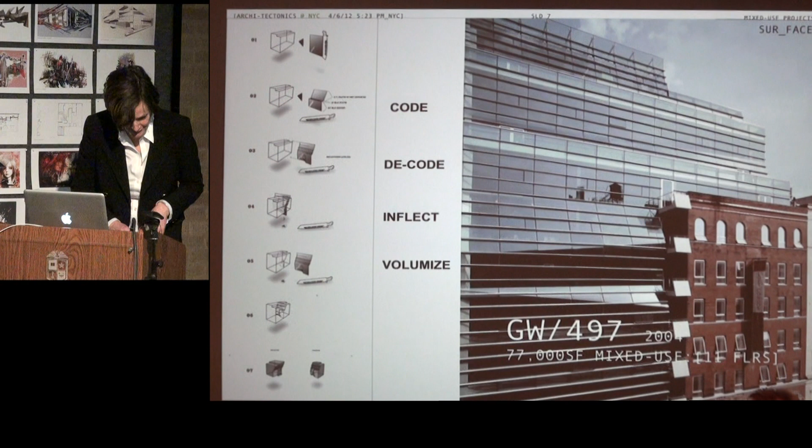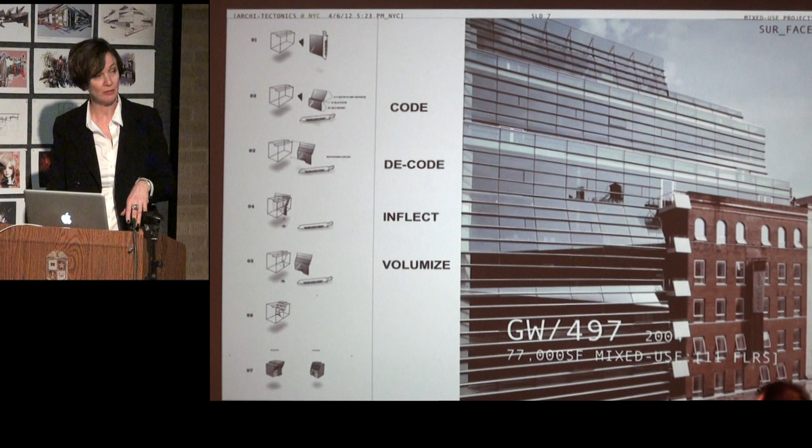I'm a bit of a mathematics enthusiast, so I started thinking, if we use inflection as a method, could we inflect that sloping plane? Using inflection means the sloping plane inflects on the straight and vice versa, creating a system that ripples down from the top and transforms the facade not only in 3D, but into a membrane you inhabit. So the idea is no longer that you have a building and smash a facade on top of it, but the facade becomes three-dimensional and inhabitable.

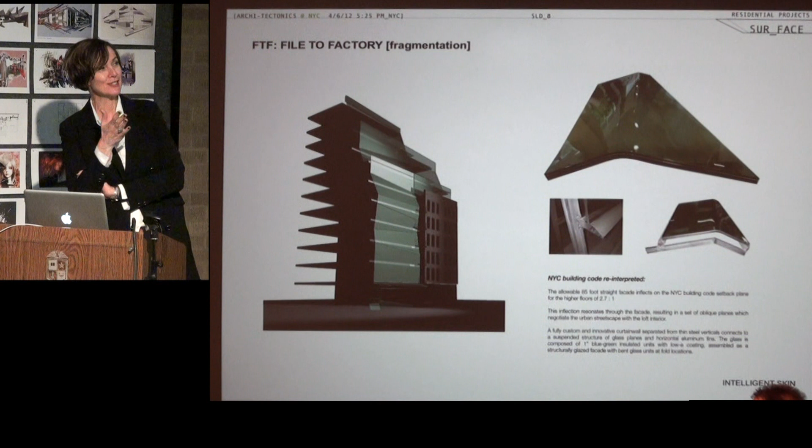So in essence there were two solutions: either I didn't do a folded curtain wall, or I stopped calling it a curtain wall. I decided to try that first, so I called it a glass wall instead. This sounds peculiar, but a curtain wall is a standardized system, and standardized systems are very 70s—you repeat the same unit over and over. If you call it a glass wall, it means it's customized and you can do whatever you want.

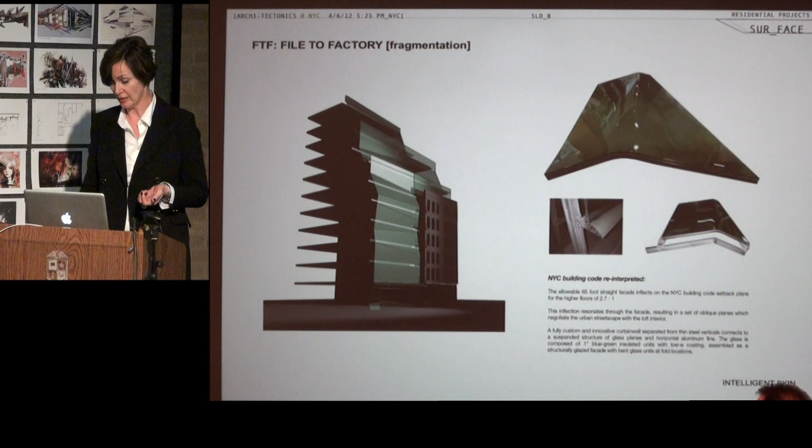That's what we did in the end. We started fabricating the glass in Barcelona with double glazing, extruded the mullions in Hong Kong, and put the whole thing together in Brooklyn to build this facade, which was a little scary to begin with. When the glass arrived, it was one of those moments where you think maybe this wasn't such a good idea.

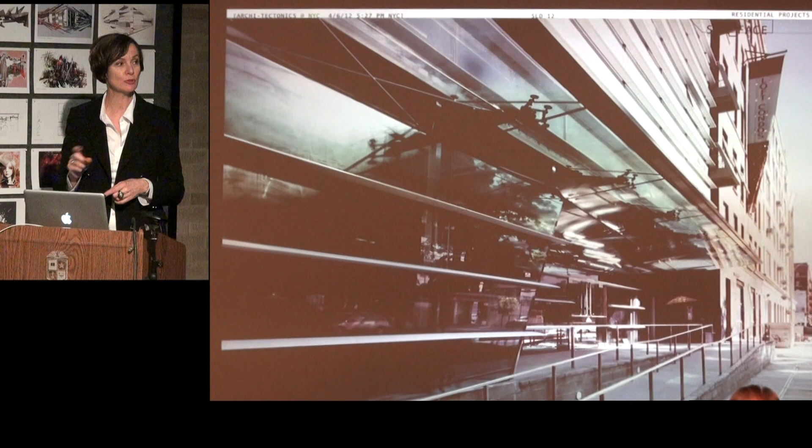This was also the first time I started thinking about parametric design, because if you build something in Barcelona where people speak Spanish, and in Hong Kong where people speak Chinese, they don't necessarily communicate well with each other, or with us. So the only way to get this done was to send 3D files around rather than 2D drawings—we sent 3D files with XYZ coordinates to all those countries, and only made 2D drawings to put it together on site.

We did this with Form Z still. During this period we designed everything in 3D but drew the construction drawings by hand, which was a very peculiar phase—exactly the opposite of other offices who sketched by hand and put everything into AutoCAD. It worked a bit backwards, but it was the way to do this, I guess.

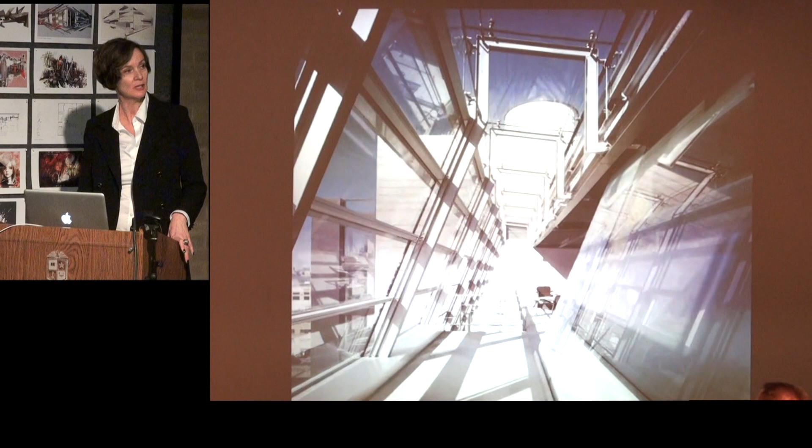Halfway through this building, we gave up on drawing by hand and moved to Vectorworks, which was a good solution. What I want to point out is that every time the facade turns closer to an edge, we made it very 3D. For example, where the entrance is, the glass wing folds out and becomes very three-dimensional, and up top it comes up and over to form a glass bulkhead.

This is the entrance to the roof terrace, where we convinced the contractor right in the beginning to drag this huge piece of glass up to the roof, about 20 foot long, and then glue the pieces together to make a glass bulkhead for the penthouse people.

In the building, we actually didn't make traditional layouts. I'll explain more about that later, but I kind of hate hallways in the traditional sense. Also in New York, it's hard to predict which people are really going to buy your spaces. This particular one is a 3,000 square foot loft for one 28 year old person, but there were others like 1,800 square feet for whole families.

So we designed this for him, and we started thinking it would be beautiful to have an east-west connection, so you see light coming up in the morning and going down at night, making an artery which becomes the connective device for all the private areas.

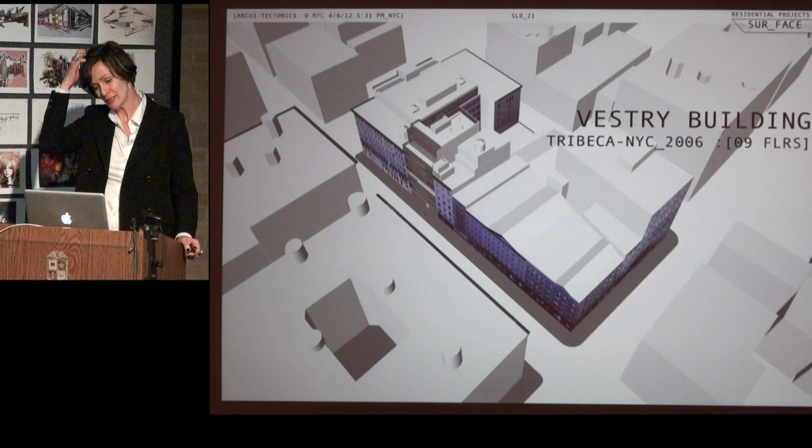Not long after, we got a question to fill in a parking lot, which was here. This is in Tribeca, a landmark district - we try to maintain everything in New York. Even though Tribeca is a set of warehouses, there's the idea that it would be a landmark, which I think is good. The thing was we had a parking lot, so if you wanted to keep it authentic you would actually not build anything, which of course as an architect I wouldn't promote.

So they gave quite some liberty, because what are you going to do? If this building is completely different from that building, or that one, or that one, it's kind of hard to define what a landmark is or how you would even build it. So I told the landmark committee that I was more interested in the quality of an old building rather than the actual copying of it.

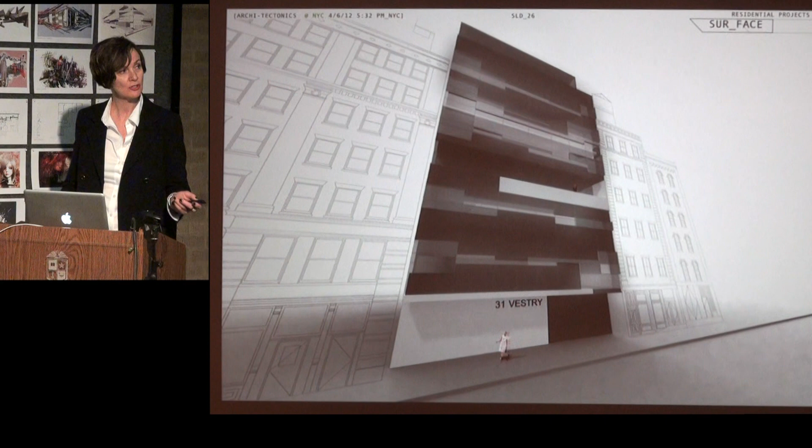What we did is we took the two rhythms of the neighbors, looked at the proportional systems of the old architecture which gave us really generous ceiling heights, looked at proportional systems of the building volume overall and the materials in Tribeca, which are stone and steel, and came up with a pixelation of stone, translucent stone, glass, and translucent glass. It's really important for us, with a traditional building, to delaminate and fragment it into a very flat facade on the north or street side, and a very delineated, highly accentuated facade on the garden south side, so the sun gets deep into the spaces but doesn't overheat any of them.

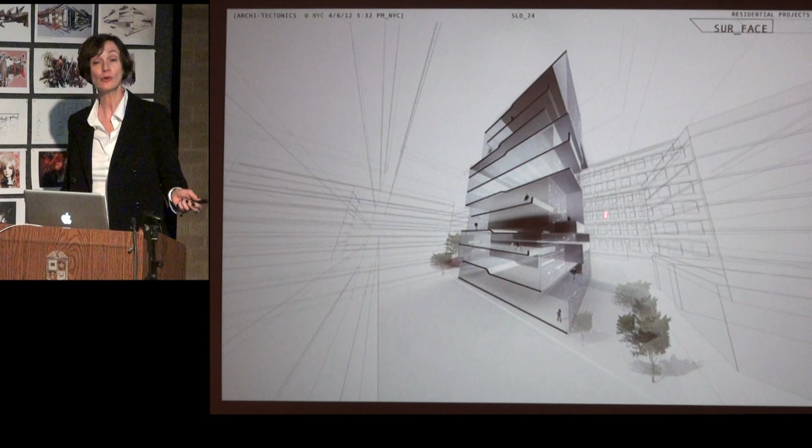The building method we used for that is to actually use poured-in-place concrete, so that we could use a very strong frame which starts to carry the whole building. And rather than making walls, we compressed the space on the street and made it lower, and then opened it up in height at the garden, so you get deep, deep spaces. That's then the first kind of idea of the back facade.

This is not exactly a building for poor people. It is basically a set of stacked villas. And it made me realize, as I said before, standardization is something of the 70s. It also counts for how we build our apartments. If we live in a building with multiple apartments, there's no need for these apartments to be the same. So here we find two triplexes, full floors, and then a duplex. Essentially the idea is that you make them all different, and then you can go shop for your apartment like you would for a sweater. Fit the one you like, and have that one as your apartment, rather than thinking I'm going to have the same one as my neighbor. I think that's a more inspirational idea.

And then in the front facade, because we did this pixelation idea, which by the way was a quite interesting thing to explain to a preservationist committee, where you have 30 preservationists and they all expect you to preserve something.

So I had to give my parking lot story. And when I explained, and really we did an extensive study of the buildings in Tribeca, they started to get into it, and in the end accepted it, and even asked us for slides, because they thought it would be a good example of how they wanted to do their future landmark building. I thought that was quite a compliment, because I was mortified when I stood in front of them, I have to admit. It wasn't going so well in the beginning, so I remember when I was explaining it, I was like, oh, I don't know where this is going.

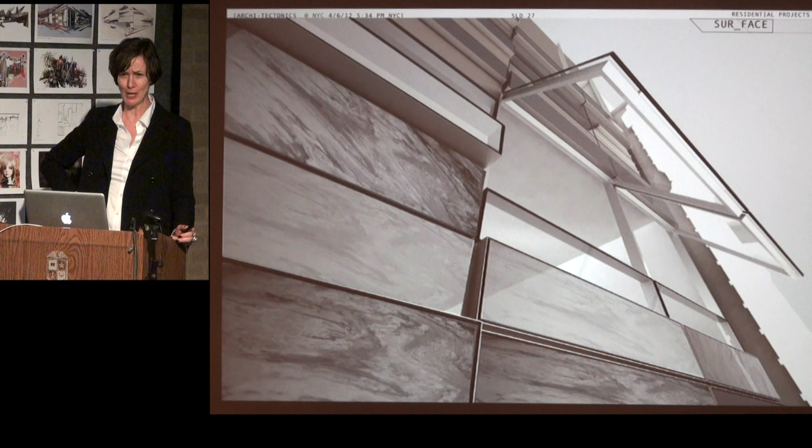My client was sitting in the back, and I saw him becoming more and more purple. We had told him, please don't say anything, because he's very passionate. At some point he couldn't hold it anymore, and he stormed to the front. By this time he was dark purple, and said, well, I just want you to know that I'm spending a lot of money on this building, and I think it's going to be amazing quality, and we really studied this. This is what I wanted to say. And then went off again, and I was like, oh yeah. That was maybe not the best kind of preservationist story.

But it was interesting because I do think his passion and his commitment to quality was actually really convincing, and so we got to build this building. Now, what you might have also noticed, I'm extremely interested in innovative or hybrid materials, because I think where we are now, the fact that we can use hybrid materials and actually innovate materials by making them hybrid or mutant is that they become stronger, more interesting, and you can do more with them.

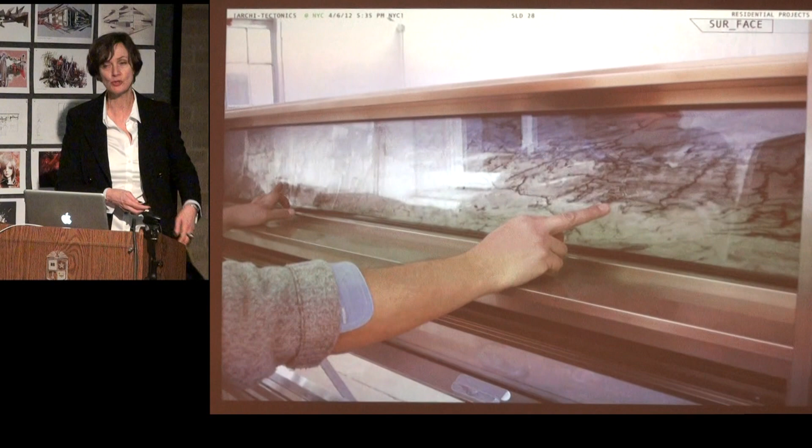So in this case, this man is pointing at translucent stone. The person we met was in Spain, but in the end we made it in Italy. It was funny because the curtain was made in Italy, but the profiles, I forgot this thing, the profiles are ultra thin. These mullions are very, very thin, reinforced with steel. They're from Schüco in Germany. So it's a very international little facade.

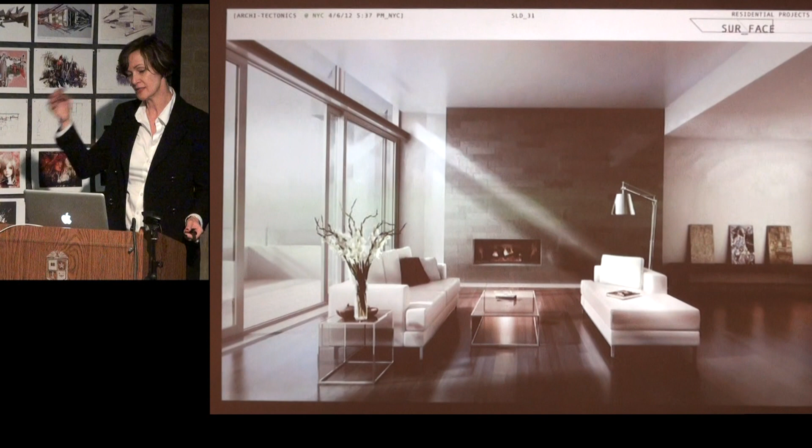And this is then how it starts to look, and this is how it looks now. So you get these kind of small protrusions. We made the boxes in very thin stainless steel, so they really look frameless and they're suspended from the facade. And then here you see that kind of idea of the huge extensions in the back. So the idea is really that you have in summer a bigger house than in the winter, but visually a lot of light, but not a lot of overheating.

And of course bathrooms, as you might have noticed, I have a bit of a bathroom theme. I have actually two things: I'm against hallways and I like nice bathrooms. But my bathrooms are a bit excessive, so these are all on the facade with sandblasted glass and some stone in it to make it a bit more private. Steaming doesn't necessarily work when you're in a city, but I think it's really important. If you live in a big city, it's one of the moments where you actually relax and can have a moment of peace.

The penthouse, I started thinking about turning it inside out. So on the bottom, it's really wrapped in a big terrace. But then here, this stair was a small inspiration from my trip in Greece. I realized it's very nice that these houses in Greece have this constant in-and-out relationship through external stairs. And then, of course, when you go up, you have a nice view and a pool.

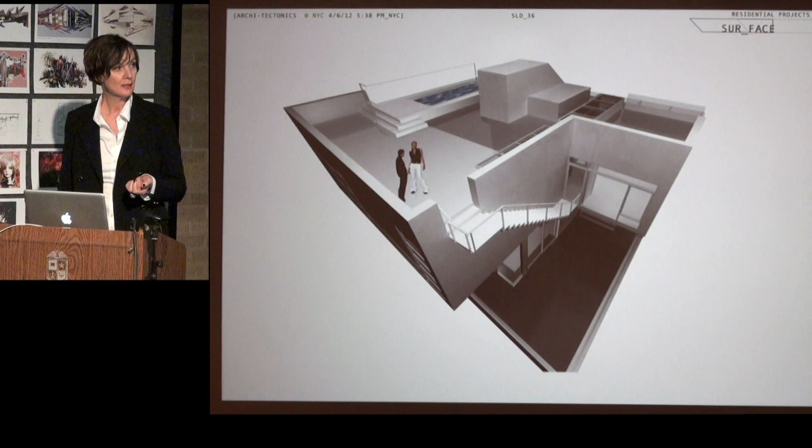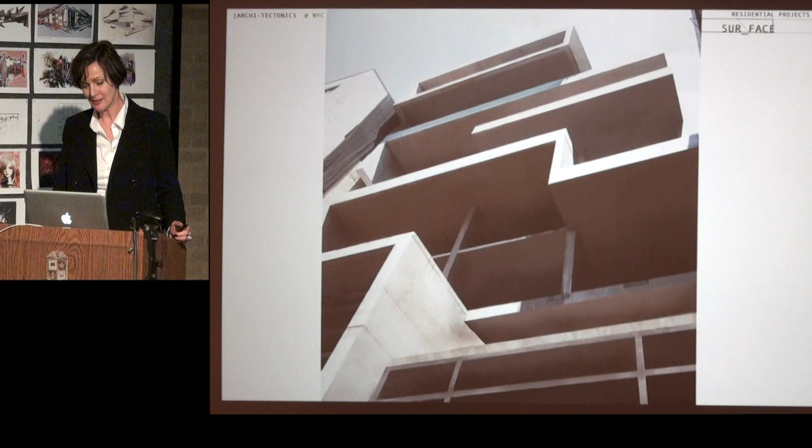If you build it in concrete, the benefit is you can really extend or cantilever the stairs from the concrete wall itself. It's a little bit like a stairway to heaven - you have that feeling where, just in the last moment, you cut through the wall and go to the roof terrace. This is my favorite moment of a building, where the little diagram we made in the beginning is actually built and comes out as exactly what you started to think about. When it's done, it becomes a little less obvious, but a lot nicer to live in.

And we started finishing this with recycled Ipe.

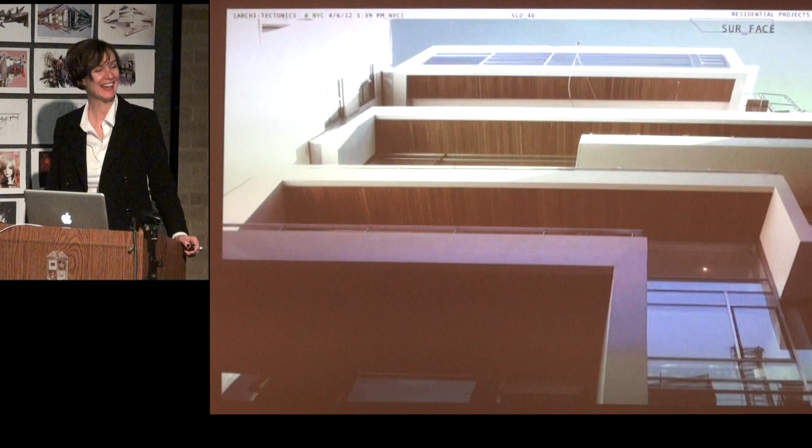The benefit of working with Italians is that they're a lot less sensitive to liability, so they can really build large spans - they're not afraid. They come in with huge glass planes, break it a few times, and ship it over anyway. They're very happy, always positive - I have the best conversations with them.

And then here you start to see - so these are the two. This is one of the triplexes, which has a kitchen down here and a connection between the bedroom and the living room. The one next door has double height between the living room and dining, and has a separate balcony for the bedrooms. So they're essentially completely different.

What I forgot to tell you, which is maybe interesting, is that this looks like the ground, but it's actually the roof of the basement or cellar, where we have parking. So in the front of the building we have a garage door and elevator - you put your car in, go down with the elevator, park your car in the basement, and go up to your house. It's a very New York solution to life, which here would be completely ludicrous, but there it makes sense.

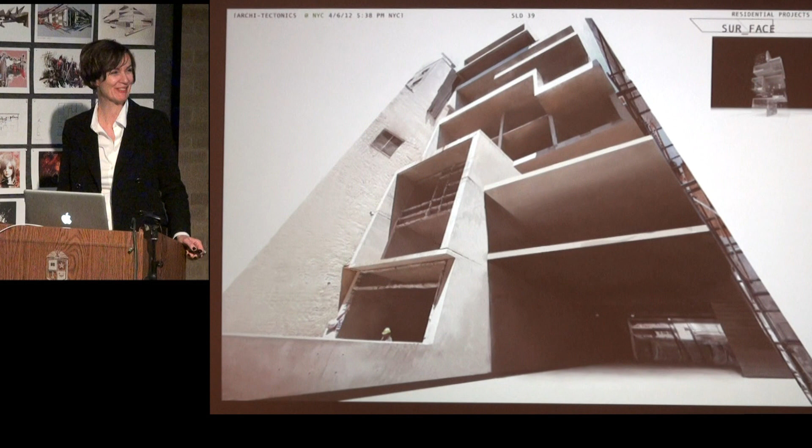My client came up with this at the last moment - I'm very European, so I put small cars in it, like an Audi and Mercedes and whatever. And he's like, 'but what about my Suburban?' I actually saw them fitting a Q7, which is kind of a smaller Suburban.

And then here you start to see the stone, how it starts to reflect from the inside. What's very nice is that by day the stone glows on the inside, but by night it's the opposite - so the building really reverses.

This is another bathroom in the facade where you have the stone, and then different layers of finishes. All the tiles we use are stone tiles, and in these bathrooms we use the same marble. The marble story is another one - it's quite interesting. If you ever have to choose marble, it's not easy. You get a stone block of 7 by 7 by 7 feet, and you have to predict how it's going to look. So it was quite a relief to see that it actually worked out.

And then we do smaller projects. This is the creative director of a company we also do the stores for internationally - we just did one in London, Shanghai, and Paris.

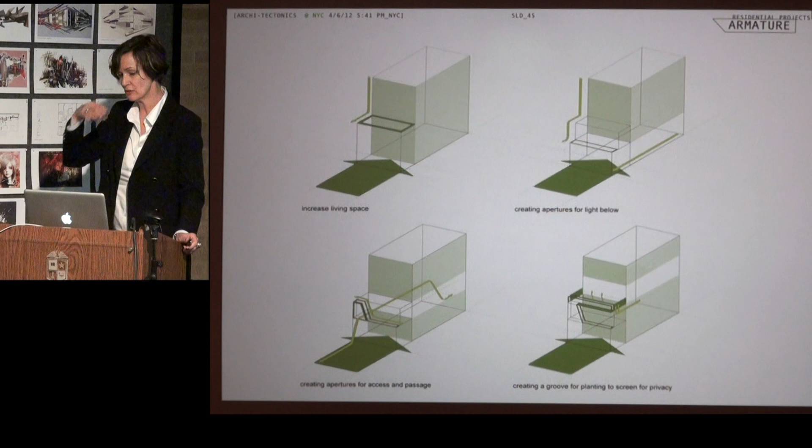When I met her, initially I did her townhouse with her. In New York, what happens is you get a townhouse like this, and you're allowed to push out the bottom two floors by 12 feet, which we did. So that was extended, giving a bedroom floor with a large terrace. But more than that, we thought it was really important to have this oblique connection, because the one thing I learned from the Greenwich Street building, the first one you saw, is that when you fold things, you have not only a folded facade, but also beautiful connections up and down.

And so that building is actually quite voyeuristic. I live there too, and I found that no one ever talks about that, which is quite cute. Everyone's looking at each other and no one is talking about the fact that you can.

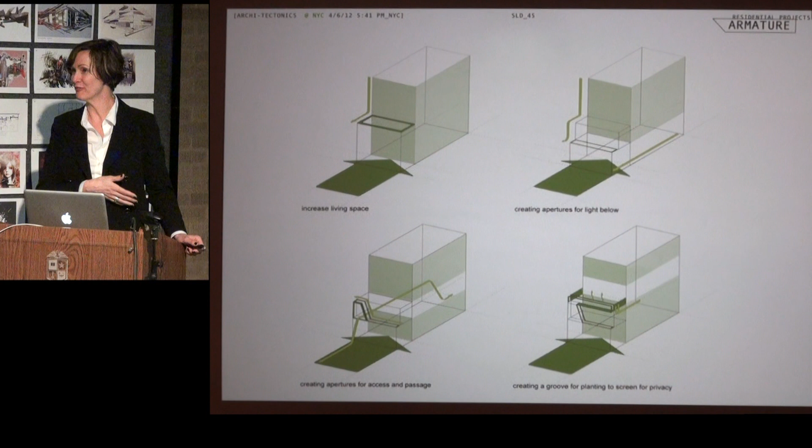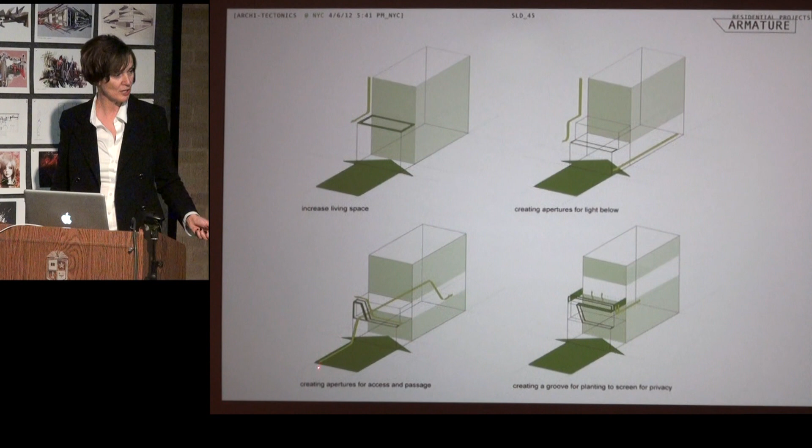But since this was for one family, I thought it'd be more excusable. We thought it'd be really nice to have a writer's studio for one of the partners on the ground floor, and then the second floor, the parlor floor in these old houses, would be connected vertically through a fold in the facade, as well as from this door you could go down to the garden. So we started working with the facade so you have this connection from the writer's studio outside, the garden becomes an exterior room, the living room also has access straight outside. And then here you have that oblique moment where you can actually go outside.

Again, this facade, I got really into customizing facades when I did that big building. This one is made out of double glazing in very thin steel. We finished it with a car paint, very heavy black car paint. And then everything is openable. The doors here are steel with wood. This is recycled wood from an old boat I bought in Bali for like 3 clients at the same time, because there's a lot of wood in the boat. It's really beautiful palisander, and you see it here on the stairs.

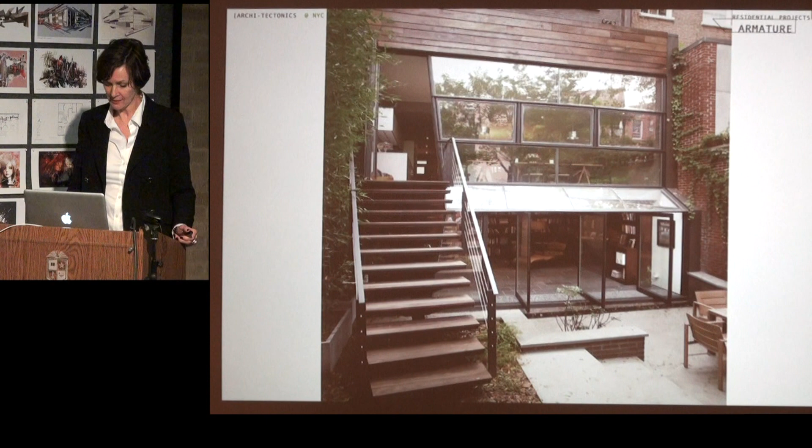And then you have this amazing connection with the garden. So this very thin facade really extends to the outside. Because the building originally has a very small floor plate, every floor plate has one function.

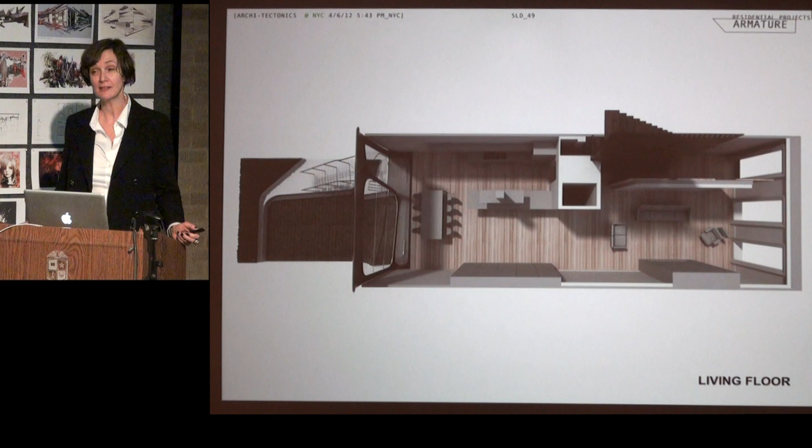So the ground floor has the writer's studio and a small guest room. This is the main floor where you come in. We totally took the stairs out. This is a set of doors I'll show you in a moment. We made them with a 6-axis CNC mill, made in LA by one of my friends who has the biggest independent car design company. And then you have living, dining, kitchen, and the stair to the garden.

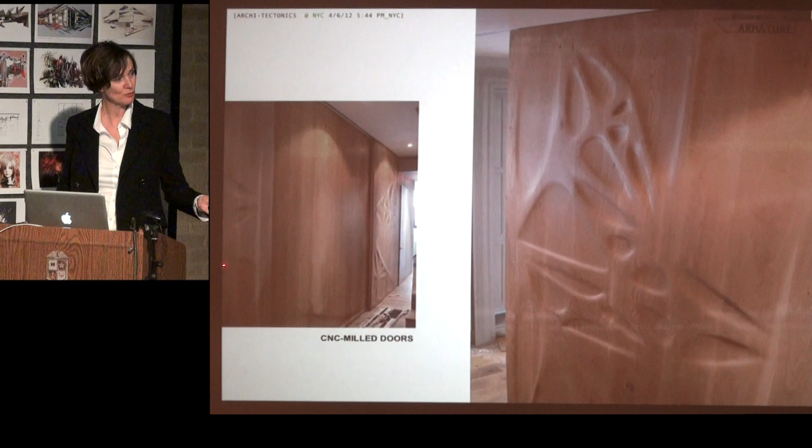And these are the doors. The idea is that in winter you want these doors closed, and then the whole wall has one pattern. In summer you would like these open, so you open it and then it forms another pattern. These are very, very thick wood doors, incredibly heavy with a very heavy track. But it's very pretty to see this kind of continuity. So here, for example, they're open, you see the living room.

And then the new stair with a glass sheet which runs up 4 stories, all the way up and down with a skylight on top. The bedroom area with the extension with the terrace here, bathroom, bedroom, walk-in closet, and the bathroom.

Again, a very small bathroom. I started bringing stuff in from Bali. This is made in Bali. It's really a nice bath, made from very, very thin concrete, colored through and through in white. It's interesting because this is actually Corian, shaped in one piece, which looks very similar, but this is actually a cementitious bathtub.

And then this is that terrace where you have these same doors again with the palisander in the black steel, all pivoting, and a big bench planter where you can actually have that extension of the bedroom in the summer.

And then we grew a little bit, so we started doing bigger things.

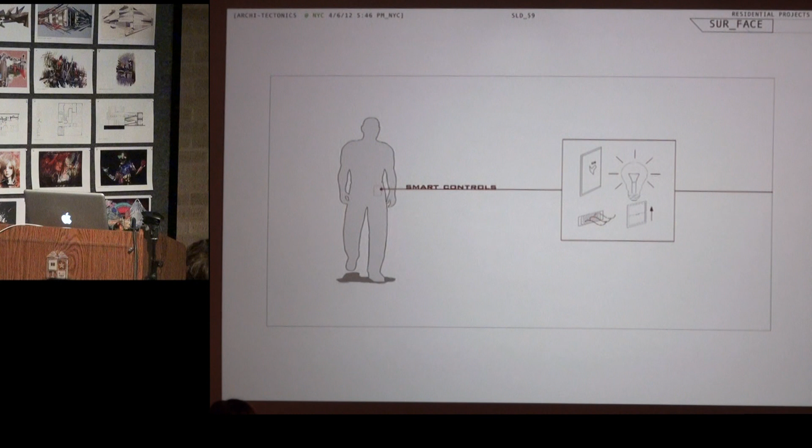One thing I wanted to show you, since we were talking about that, this is actually the beginning movie. Someone actually recently asked me, is this the only thing you gave to the contractor? Which I kind of like, which it was not. Of course, I broke this, sorry. My engineers are better than me.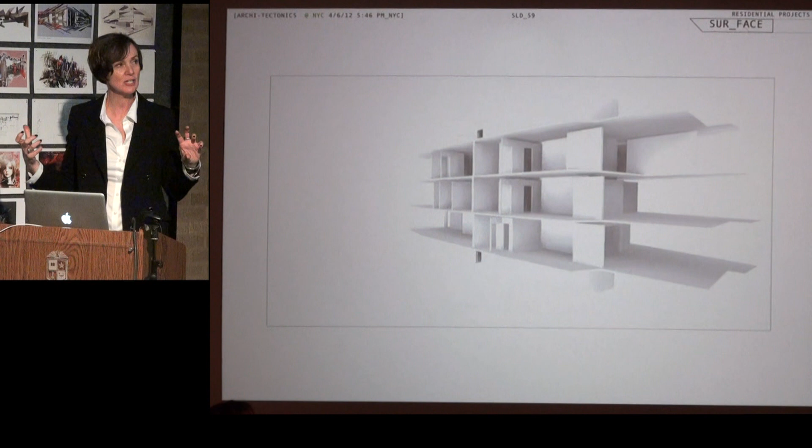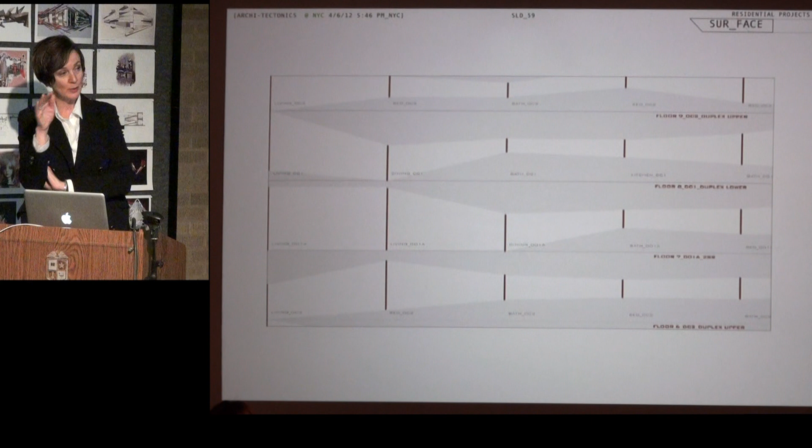So yeah, this is the robotic tower where we worked together with MIT Media Lab, and as you saw in the beginning, it was mostly making the building intelligent by linking existing technologies in a much more sensitive and intelligent system. Not completely reinventing the whole thing, but really linking existing systems, and then again thinking that each person should have their own apartment and be really special, making different algorithms for facades with one basic rule: everyone gets a window, every room gets a window. The windows need to be fluidly connected, and each apartment should have a different layout versus facade connection.

Then the other thing is, because I'm Dutch and very social democratic, I always think it's irritating that penthouses are on top of a building, because I like the second floor. And if I was ever rich and wanted a penthouse, I would like it on the second floor.

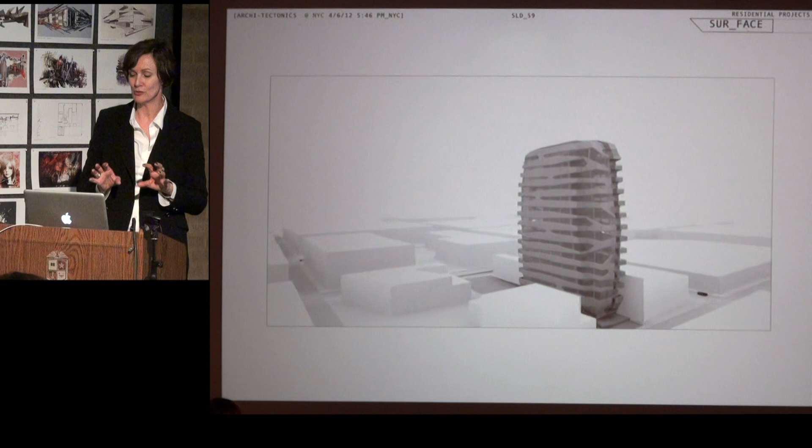So I convinced this developer to do 5 penthouses, 2 on the top and 3 distributed through the building. They're basically duplexes with very large glass walls. That was kind of a little victory, especially on marketing people who always do everything very, very basic.

You see, this is a very low neighborhood. This is actually in the more alternative neighborhood of Philadelphia, where there are the younger artists, new restaurants, cafes, and stuff like that.

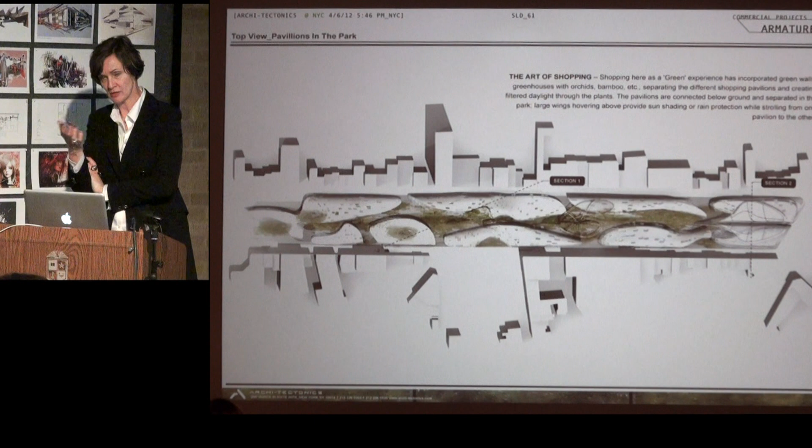It's a big shopping boulevard in the middle of Brussels, and the developer proposed to the city and the state, as Brussels is a city-state, to build and extend the tunnel, and in exchange he wants free property to build on. So he got the ground for free by extending the tunnel.

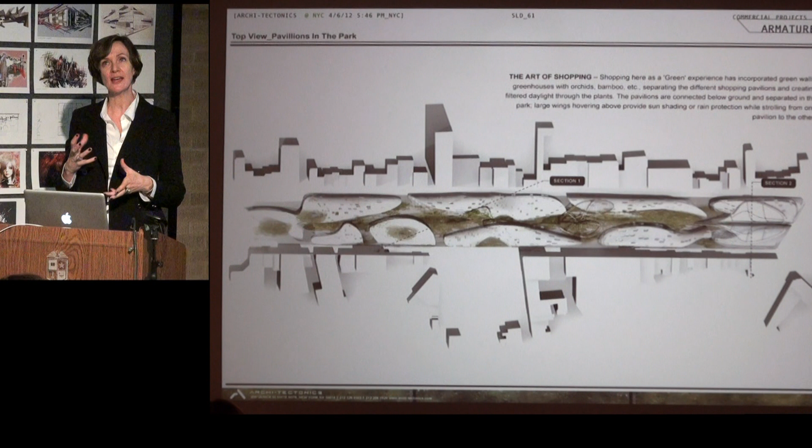Very clever move. And then they asked us to design 10 pavilions in the park. Now I was thinking when we were doing that, how do you get to design the park in the same way you design the pavilion? Or how do you not make a distinction between the two?

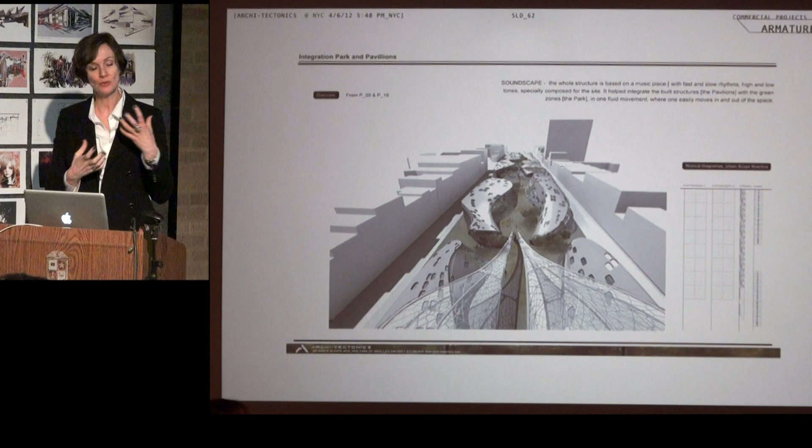And actually what you see on the right is a little graph - a set of, we wrote a music piece for this piece of land, took the scores, the frequencies of the sound, put it in Maya, and started to study the waves of the site, so that the resulting shapes were not only creating an interior space, but even more than that, an exterior space. And that for us was very, very important.

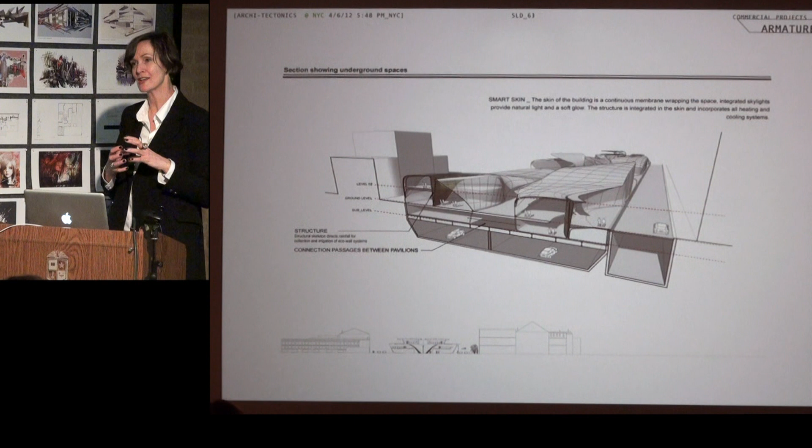The fact that we were on this tunnel gave small problems construction-wise. I talked to an engineer in Holland who was actually the one who in the 60s and 70s started to develop very, very thin concrete shell buildings. We figured out that if we made these buildings from these lightweight concrete shells, it would be possible to span on the tunnel without having to do more. Be careful though.

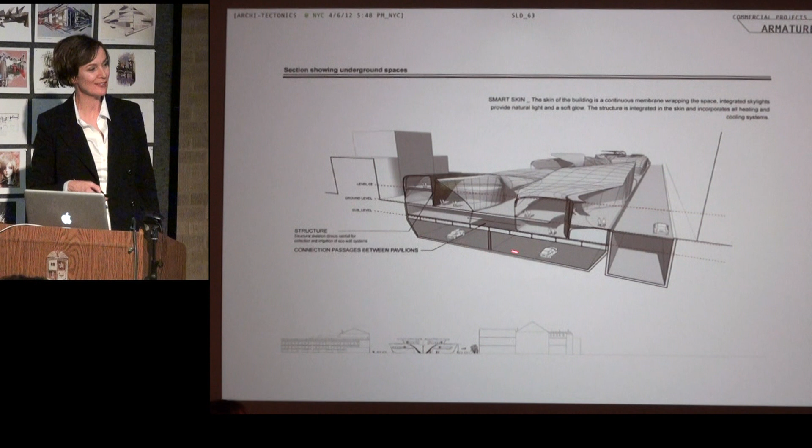These surfaces would collect water for the park, stored in water containers, with an automatic irrigation system. And even more than that, as we figured out, what always is the struggle with developers is they want to build more than you really think they should.

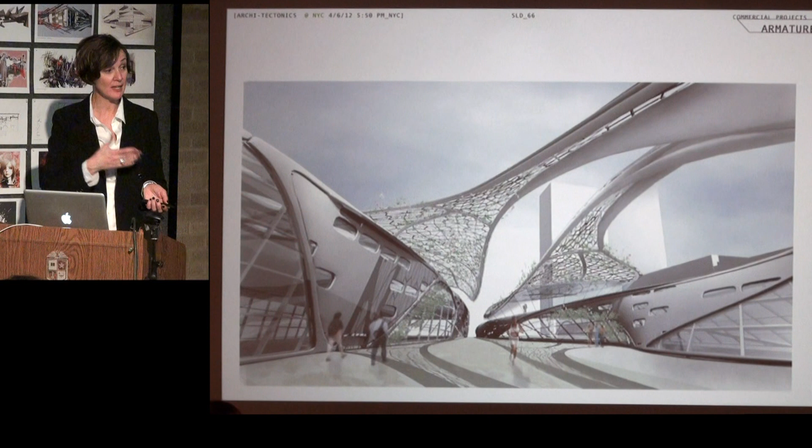I mean, in a way, you want the park to win. So, as the park wasn't really winning, we proposed a set of green solutions, like hanging green gardens, greenhouses inside to separate either retail areas or gallery areas from retail. And we invited, since we were thinking that sustainable could also be really interesting on an artistic level, a whole bunch of artists who were working in kind of green, literally green plant way. So we thought anything plant related had to be either cultural, sustainable, or just pleasurable. The pleasure principle - really important.

And then these volumes - this was one sketch for the hanging gardens, they were here. So long story short, we proposed it to the city, it got approved, then the city said, well, since we are a city-state, the state has to approve it too.

When it came to the state, they had two questions. They wanted 30% to be cultural, which was actually a huge benefit, I thought. So that was nice. But they also wanted an ice rink bigger than the one in Rockefeller Center. I don't know why Brussels is feeling competitive with New York. So I made this ice rink, which is 30% bigger. We thought if you make it bigger, then you don't do 3%, you want 30%. So let's make it 30% bigger.

And since it is not very cold in the summer, this then becomes a really nice square where you can sit on the edges and see performances. Or in winter, you can actually go skate.

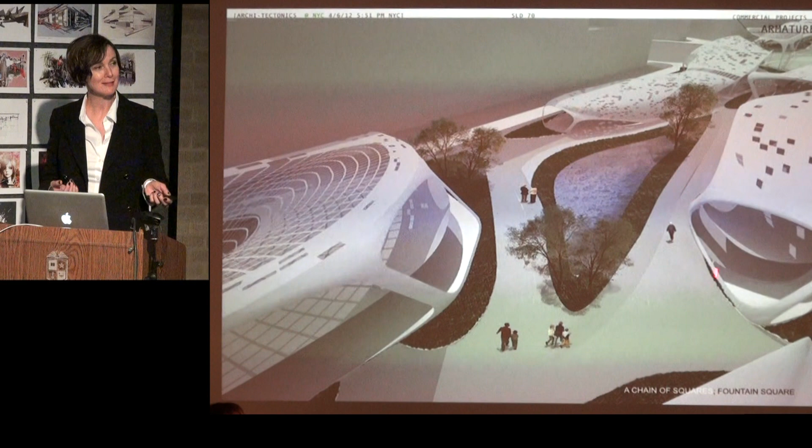And then the other one we added, which we thought, well if we're doing this anyway, the square idea - this is a fountain which reacts to traffic noise. So lots of traffic, lots of fountain, no traffic, no fountain. And also quite a surprise thing, so I thought if you walk over the fountain by accident, you can really experience that.

And then once in a while we do something because we think we should. This happened when this thing starts once in a while to think itself.

Computers should not be clever.

In the middle of a crisis, we realized that, you know, first you feel very sorry for yourself, everything's postponed, things are a little bit slower. And then I thought, well, half the world is doing much worse than we are, so let's think about this again. And thinking about fragmentation, one country which had serious fragmentation was Liberia.

They just came out of 15 years of civil war and are rebuilding their whole country. And I knew someone who was thinking of building a school for all the orphans who are a result of this civil war. And so the fragmentation of the environment has caused a huge change from villages into very, very small communities, which are not always very friendly to each other.

Oh my God, please stop this. I think what it does, whatever.

So what we did is we went there, and I offered the foundation to do the school pro bono for them. And when we went there, I knew we were in trouble.

This is the moment when we, sorry, this thing has gone crazy. Stop, please. That's really interesting, let me just push it back.

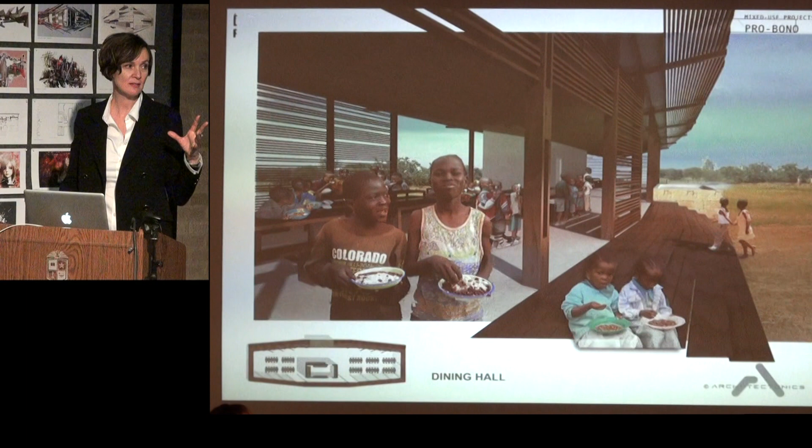So where I offered to do a school, I ended up doing a sustainable village, where we had academic buildings. We started thinking of how to build this and realized that you really have to think about everything: passive ventilation, collecting water with the roofs, storing it, having open air environments like this dining hall, and to make this around a set of courtyards so that people or the kids could do their homework and really feel that this environment is something they feel safe in.

So what we did a lot is make these double skins to have them do their homework, to have them have a filtering, because they have either too much water or too much sun. It's hardly ever that it is not anything. And it was quite important to us to kind of create this kind of new sense of community.

I mean, this thing is totally crazy. Sorry, I don't know what it's doing. Maybe that helps.

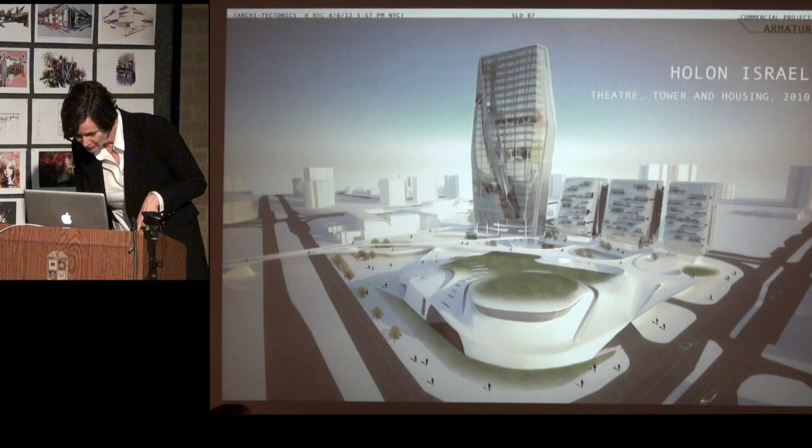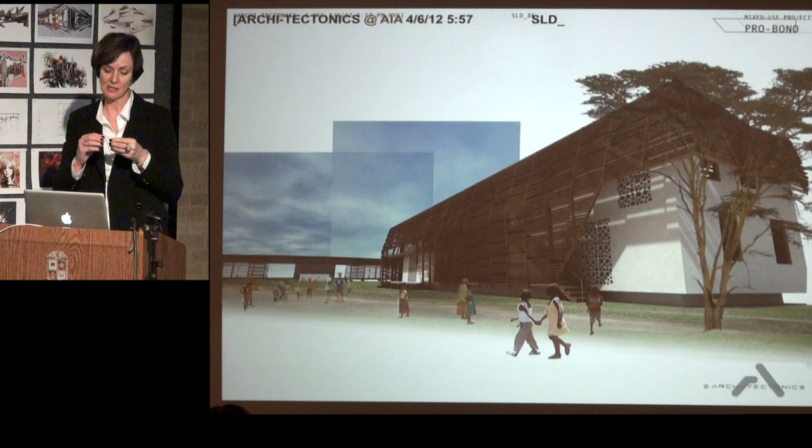But also we try to make it sustainable, not only in the sense that it creates its own energy, also in the sense that by creating its own energy, it can sell back to the grid. So hopefully this little community, which is now located next to a small village, which is another kind of good feedback, will be sustainable also financially, which is the next challenge, of course.

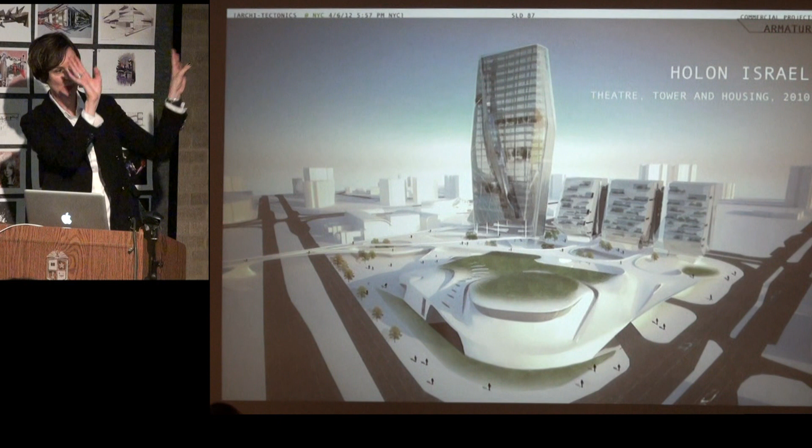Then the city of Holon invited us to study a problem they had, which I think a lot of big cities have. They get all excited about having a huge population, they make all these big highways, and now we're disconnected, right? One neighborhood cannot get to the next one. So they asked us to make a project which was almost like a filter project, where there was a music hall, housing, a municipal tower, and a huge amount of connective devices back and forth.

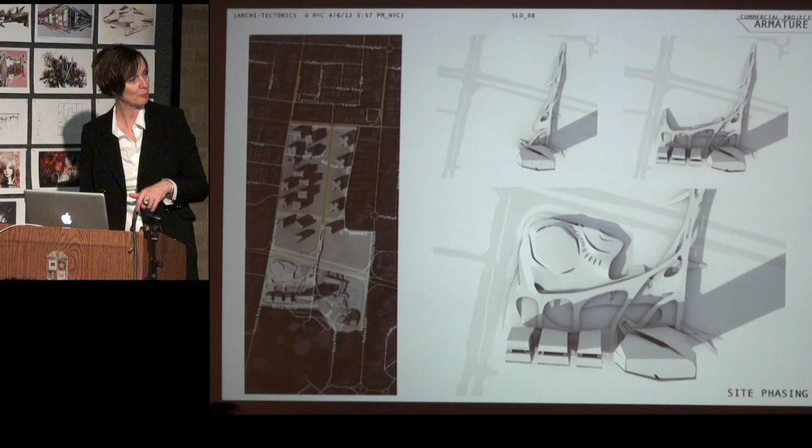As you can see here, this is kind of the plan. The big connection is to the area above here, and so this connection was really, really important. Housing is here with the municipal tower, music hall, and then a very perforated square with all the shopping and the outdoor cinemas below. As you can see here, we're cutting through the housing plan.

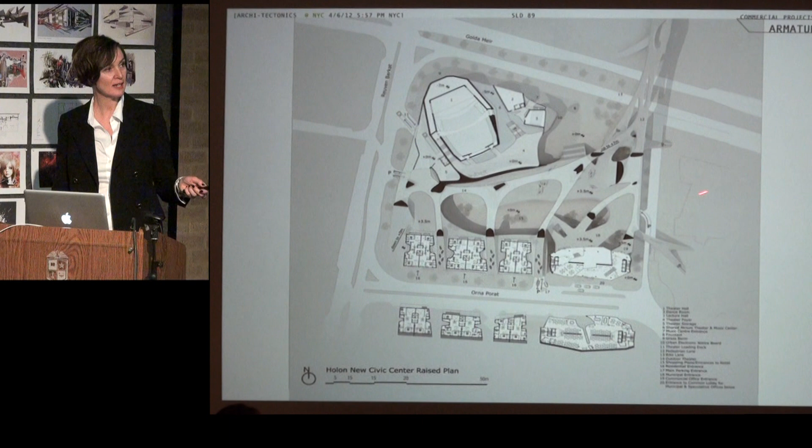Tel Aviv actually is also not that peaceful, as you might know, so there's a lot of bomb-proof rooms and funny construction methods you need to learn. But what we thought was really important also here is it has a very predominant wind direction. So we started looking at whether these kind of almost lung-like shapes could start to work for us, in the sense that it would give a lot of natural ventilation and cross currents.

So here you see the music center, you go down here for the shopping or up there to enter the municipal tower, which is coming from the bridge. This comes down from the shop or up from the shopping. It's important to us also that that whole bottom of the tower, where you get your passport, you have to pay for your traffic fines, was very much part of the plaza, so it has a very, very light skin, and also from the inside out back connected to the whole area.

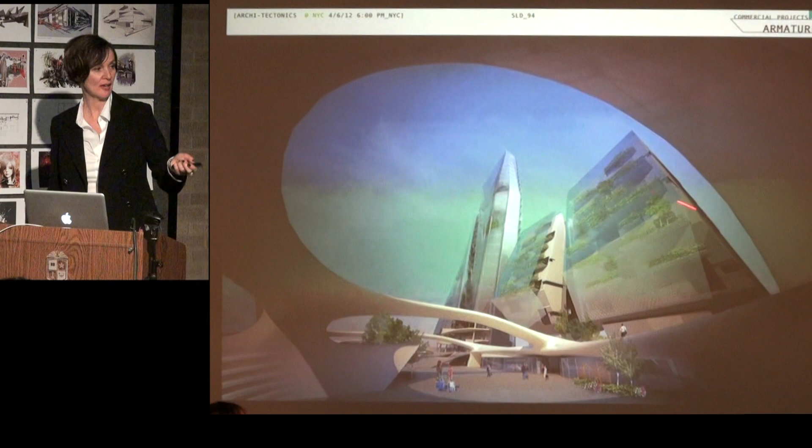And then from the lower area, again, you have this very, very easy connection. There's an outdoor seating area here. And this was kind of the idea.

So we started studying this predominant wind connection and realized that we could maybe make a tower with lungs, or a breathing tower, where it works as a heat chimney. It pulls in the cold air, pushes the warm air out. We worked with Transsolar from Germany, and also realized that if you do a tower like that, the only double skin you need, the double glazing skin, is on the hot facade, right? So as you're pushing the hot air out, this also helps cool the very hot side of the tower.

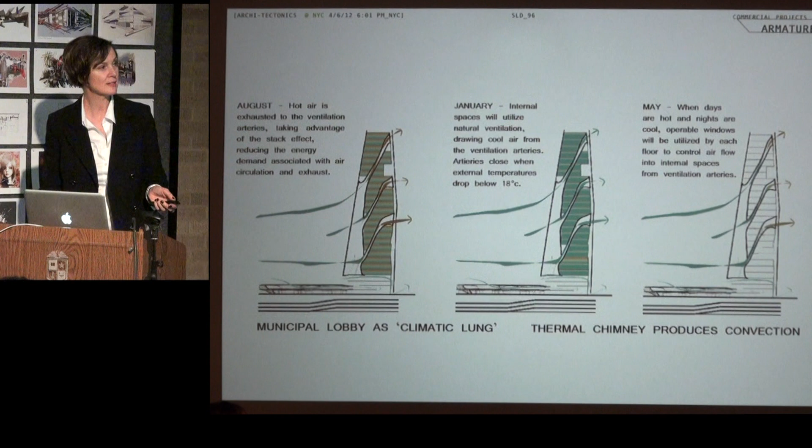This then worked double for us, because as the tower was occupied both by the municipal center and offices and small companies in there, we could separate them by these lungs, which then became social gathering spaces. So rather than thinking of a tower as an isolated unit, it became kind of a mini city in itself and started to connect back also interior to the different sections. Same idea for the music center with these kind of shark fin-like openings, which you see here.

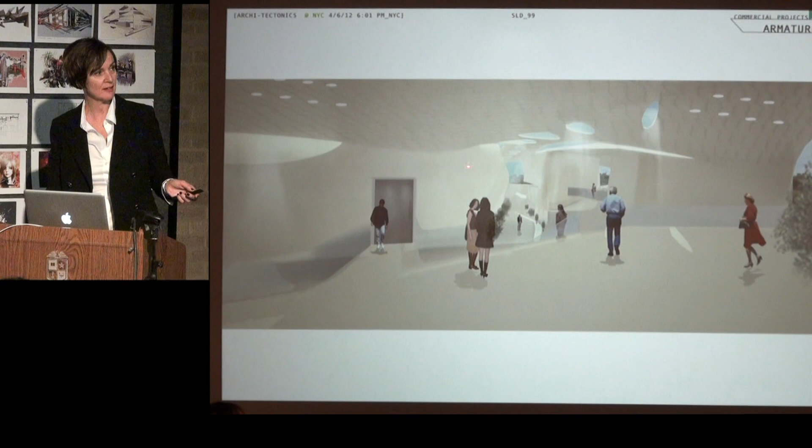And then also for the roof of the music center, where you have again that ventilation, that opening. The music center also had a music school, an academic part, which was connected to it, and had a ground floor where they shared coffee shops and ateliers and stuff like that.

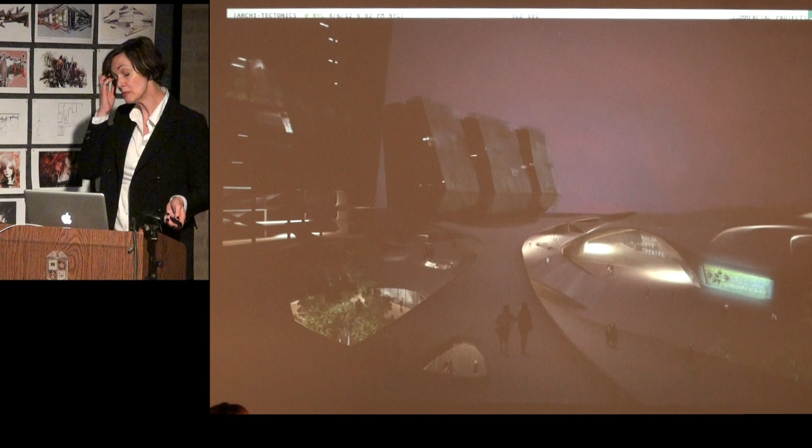And then at night it starts to have these very mysterious, glowy, almost like small oases. It gets extremely hot in Tel Aviv in the summer, and they love their sandstone, so they build everything with white stone, which my first experience was that it was very daunting, all the sun and all this reflective white. So the first thing we thought is we need a lot of these filtered areas where you can really soften the exposure of the sun on the building.

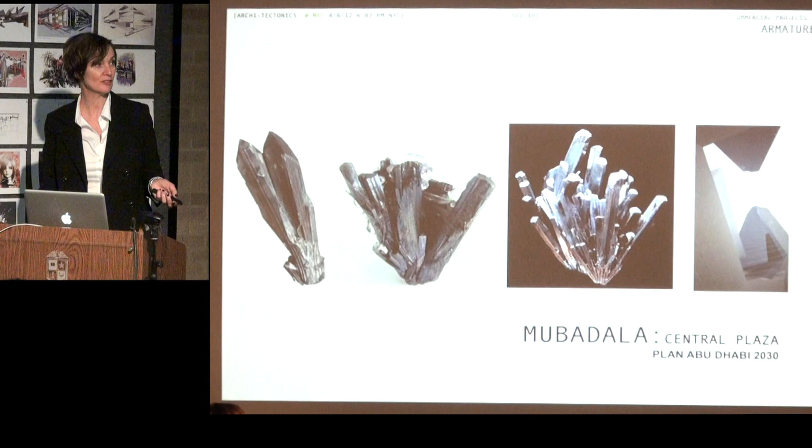In a similar time, we were asked to do a study for Abu Dhabi. There's a new area, not where everyone's building their museums, but in the center—a new business district called Central Plaza. We were asked to do a study for two towers: one office tower and one hotel tower.

And I love the shape, because the first thing he said is he did not want one of those duck towers they make in Dubai, where every tower looks like either a circle with a hole in it or like a duck or whatever. He really wanted a tower which was an urban architectural statement.

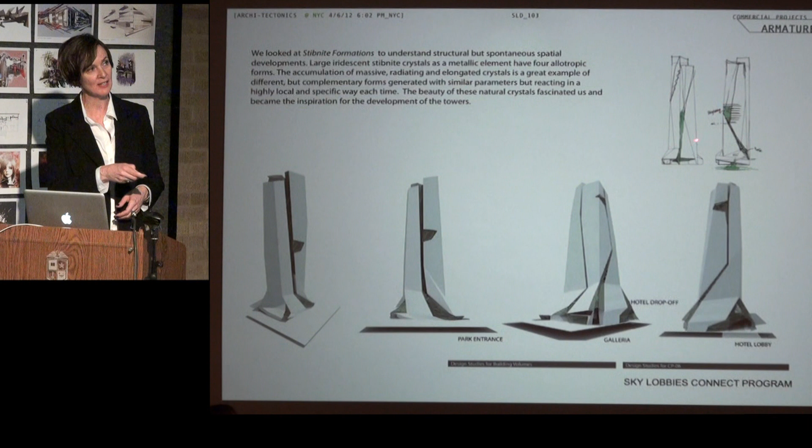And since we were very much in agreement with him, we also realized that, as I just said, many skyscrapers have a very insulated attachment to the city, or no attachment to the city at all. What was nice here is that there was an underground shopping area which connected the two towers, but also that these towers could have more of a plaza or gathering areas within this system. Actually today someone said that because it's vertical you don't see each other a lot, and I think that's definitely a problem of skyscrapers. So we started thinking about sky lobbies, which weren't just moments to switch elevators, but actually moments to meet people.

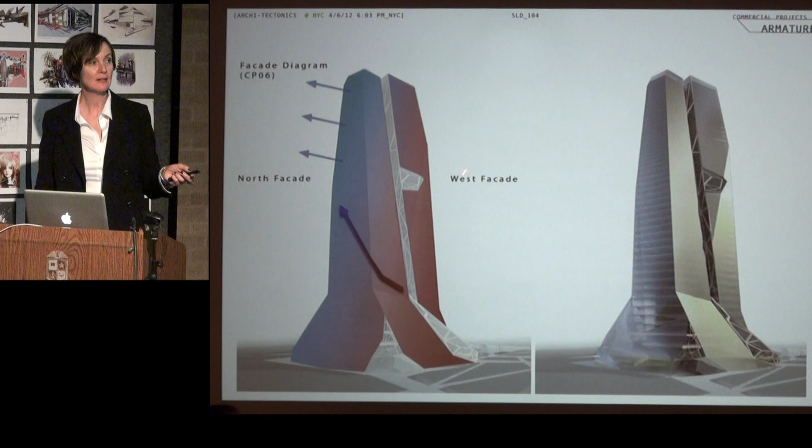We did a study of the facades. You always have cooler moments and more warm moments, so we started working with glass technologies and silver fritting to deflect that. We did a study of the intensity and worked back to the tower. Then you start to see how this ground area and the lines connecting these sky lobbies also reflect back to the garden or the park it was in.

It was a very nice idea of the Sheikh to make one long promenade, or promenade/park, where these towers were kind of rooted into.

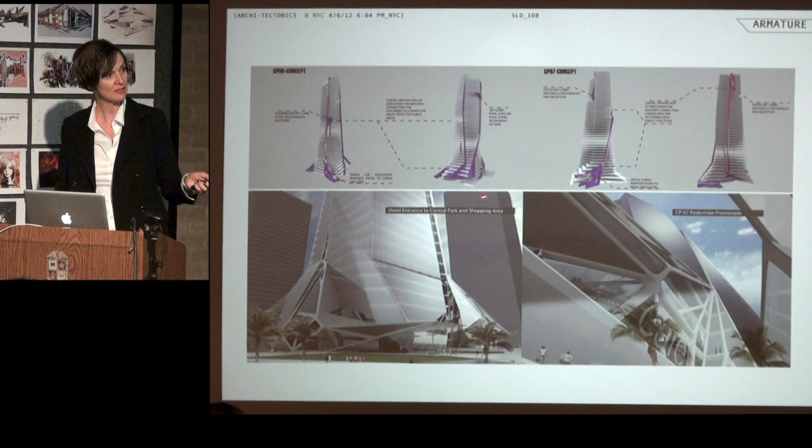The ground floor was made as transparent and open as possible, with these openings to the lower shopping area. We did studies of the connecting sky lobbies and possibilities to let lighting into the deeper atrium areas, looking up from these lower shopping areas to the towers. There's also a scaling down in material when you hit the pedestrian area, so there's a moment where you can go through small shops into the atrium of the tower, changing materials so you really get a different atmosphere.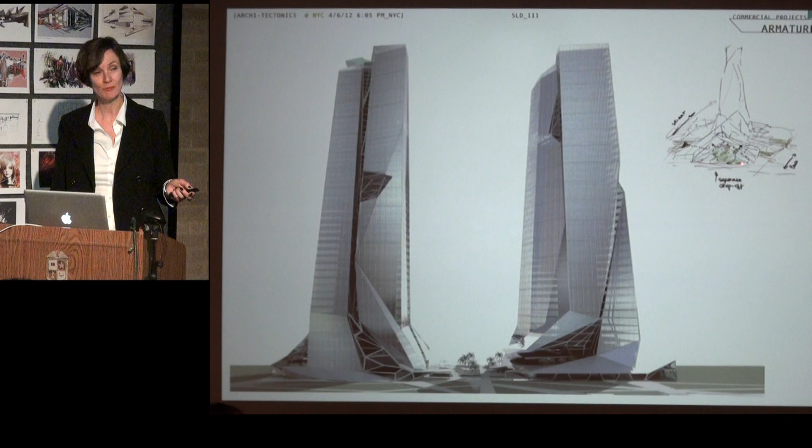We do sketches, we do design in the computer, but then we go back and forth between the computer and this.

And then the sky lobbies as they started to develop—it was also a moment where you can start to express the structural frame of the tower better, and start to create these double height moments and the light slots I was just talking about.

This was the hotel sports center, which was for the city as well as for the hotel. From the inside, from the gym area, you look down at the pool, over the other tower, to the sauna areas.

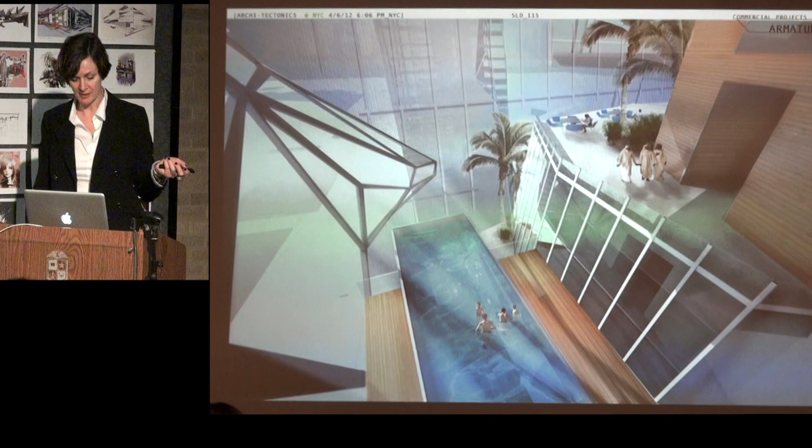And then the hotel entrance—again, one of those crystalline spaces—ramps up to the hotel and connects back to the retail areas. And finally, the atriums and how the light starts to throw in.

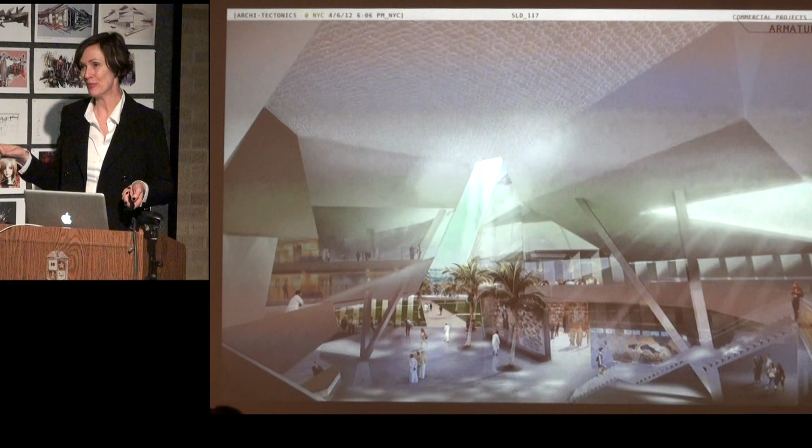Of course these countries have incredible light—it's part the negative and the positive. But by filtering it and making use of an indirect way of getting light in, so it's not streaming in immediately but often bouncing off surfaces before coming in, more or less how you would light a museum, it's very possible to actually get a lot of natural daylight into these deeper areas, which then get much more urban, much more active.

The light changes over the day, so you don't get too much fluorescent light.

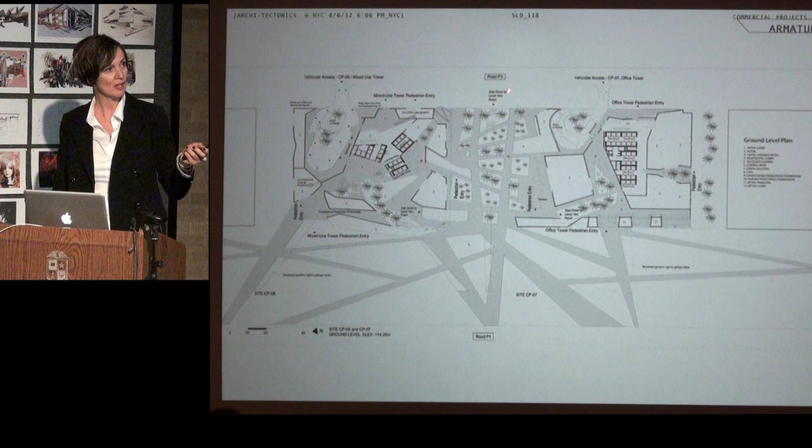And then here you see that shopping area—really below ground, it is one area combined with these atriums up there where the trees grow through it.

Plants—we do plants.

And the towers at night—it was quite nice to track these into the gardens, so that the light of the gardens along the paths was also tracking up into the towers.

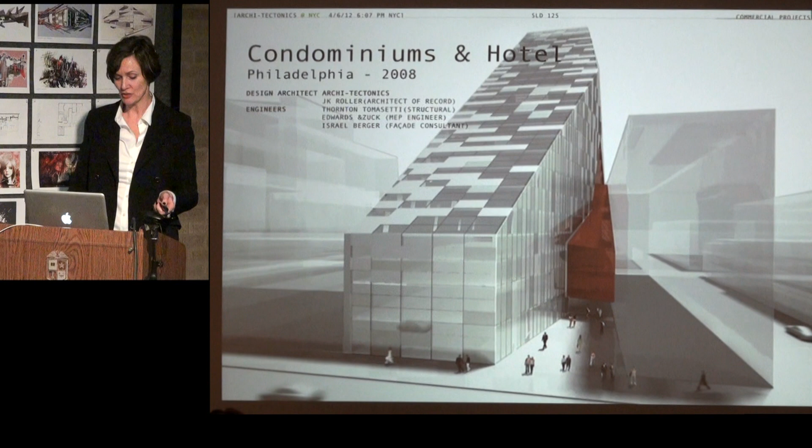And then I'll show two last projects, hospitality and retail. There's a really interesting movement in the idea of hotels, where more and more hotels actually go back to the old principle where you used to live in a hotel.

This was actually quite an interesting moment where this is more or less the zoning envelope of the site, which is 200 feet deep, 80 foot wide, so it's extremely deep, has 2 streets on either end. Originally we thought we'd just build the full zoning envelope with a vertical opening in it, which the city thought was an okay idea. But then they wanted this facade to be only 60 and not 80.

We thought that was actually quite interesting because the moment you do that, you could push the other side to the other end and actually work almost like a knot, this tower into strands, where from one strand you come in, you have all the public functions of the hotel, and then the pool juts out on the other end. You'll see that in a moment.

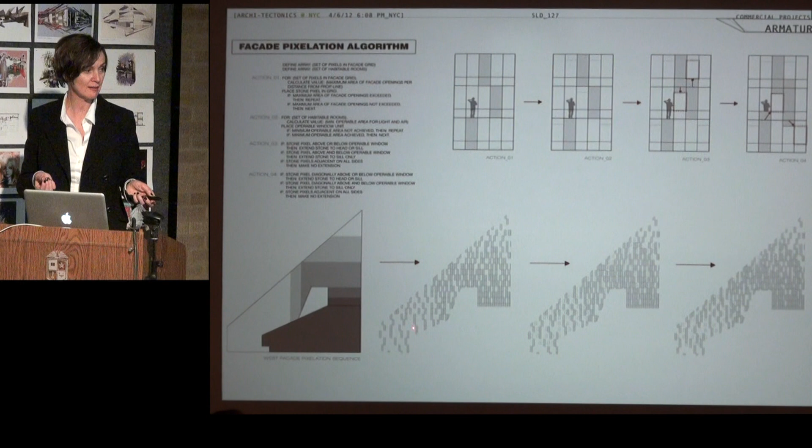And then also because it's diagonal, the approximation to the lot line will give you facade differentiation. This facade was made from stone, aluminum, honeycomb and glass, and goes from the lot line where you can have 10% glass to almost full glass here. And then as it moves back, it constantly changes transparency. So it's a small algorithm we developed to calculate that.

Because of that opening going through it horizontal, you have sometimes 1 building, sometimes 2 buildings. And the pool, as you can see it poking out here, 5-story lobby here, the ground floor connected to the 2nd floor so that you can have convention spaces, and the lobby connected through a little champagne bar. I always think if you're in a hotel, you might as well drink champagne. Big restaurant for the hotel.

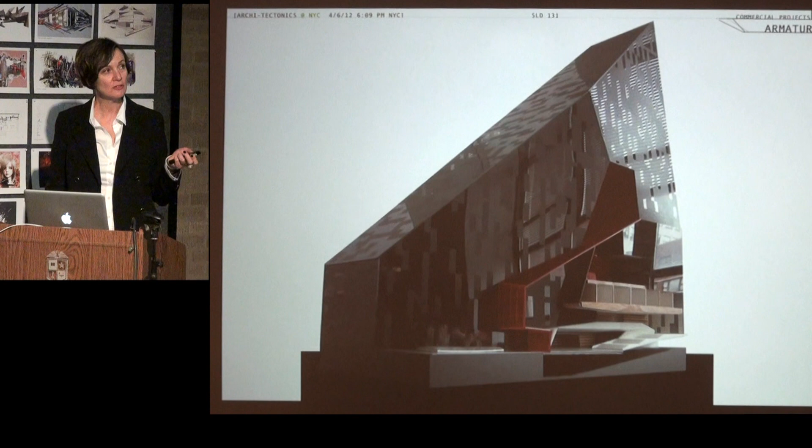What is interesting if you work on these kind of projects is that you actually get a lot of clients. You get the developer who does the building, the GHM group who did the hotel, who runs the hotel, Robuchon who had a restaurant in the plaza, the eSpa who had a spa here, Assouline Library who had a library in the back lobby. And all those people want to be at meetings and tell you what they want. It's really quite a lovely procedure, I have to say.

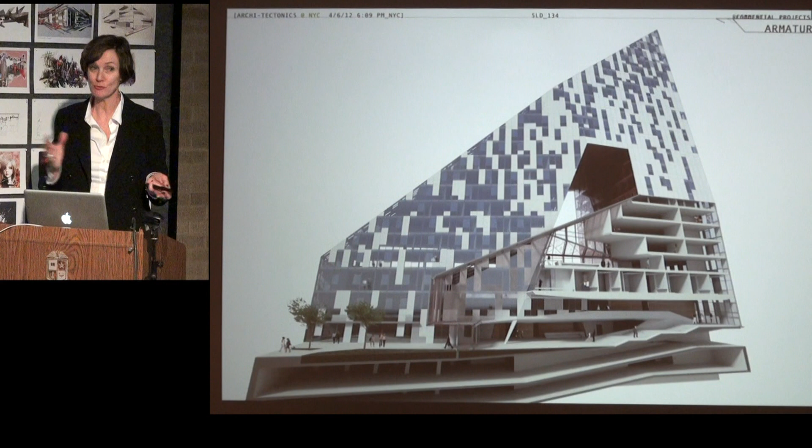My favorite person was a really big chef from Robuchon who would fly in from Paris. I always had the feeling at some point he was going to tear out a knife. And he would be very specific about the routing from the kitchen to his restaurant and how big the kitchen was. It was actually the most amazing client who was so perfect in the way he explained everything that it made it very, very easy to work with him.

And then all these kind of functions as they go through this knot, or the unknot as we call it. In the public plaza you see the building over top, and in the restaurant you see the same.

The entry plaza. And then this little light slot, which you get, where you get just enough light to light through this atrium in the evenings. So in the morning you get lots of light here, and in the evening you just get this sliver of light coming back.

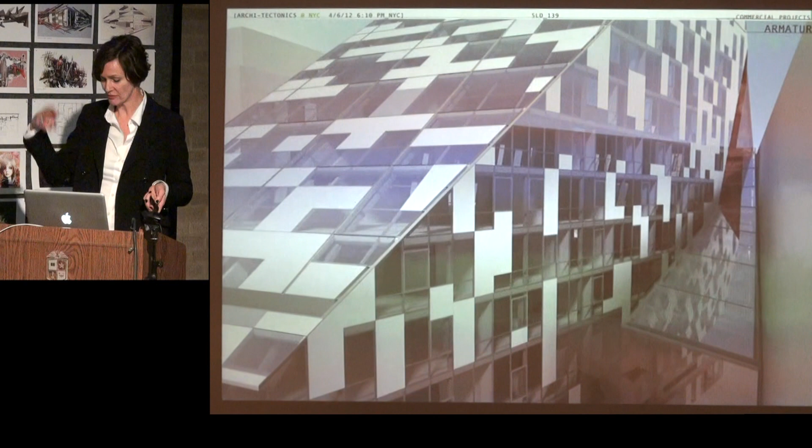And of course the rooms in the sloping part are quite interesting. They have self-closing blinds with a reaction to sensor to the sun. But we thought it was quite beautiful because nowadays in cities, with all our vertical facades, you actually hardly ever experience really the weather or the sky or how things are outside. So we thought this would be really amazing to be in the sky, or everyone would have their penthouse. This is another social democratic idea - just spread the penthouse down to the ground floor.

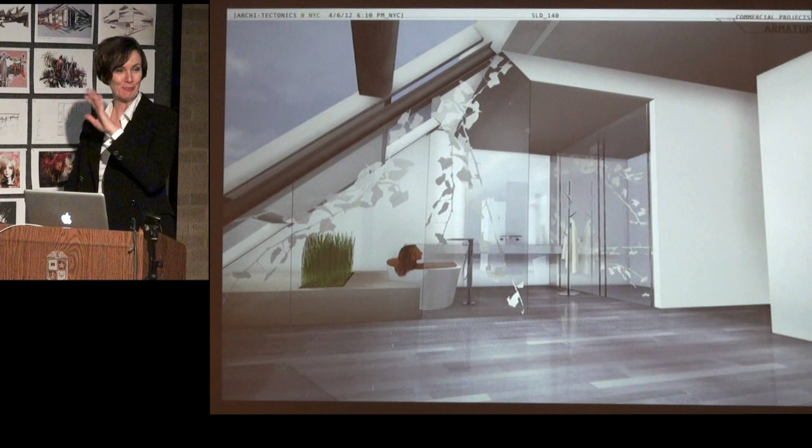And then this is the last one. This is, so the creative director we did the house for, and then we started doing her flagship stores. The flagship store in Shanghai is on the Bund, is on the water in the harbor, right here. This is also the fog in Shanghai. It's very, very tough sometimes. But beautiful, beautiful combination of naval architecture with intricate details and the Art Deco buildings they have along the Bund.

This is the building we are in, made out of this incredible stone they have there. Very, very old building, and Ports has 2 floors in there. And so the first thing we thought is to kind of counteract both the naval architecture and the Art Deco, to make a liner for the collection.

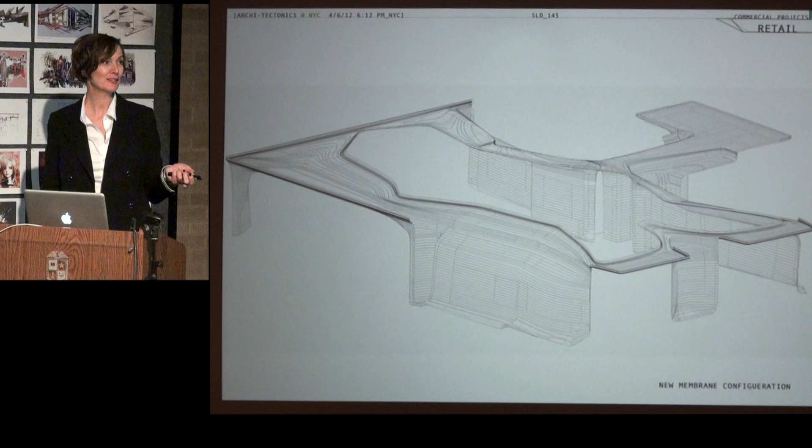So the whole space is lined with this intricate liner which really reacts to the space, but also brings back this kind of organic form of naval architecture. We bought an old Chinese wood house and brought it to a person with a 6-axis robotic CNC mill, so you get the craft of the material of the old houses and the technology of where we are now.

And then crafted this kind of big closet liner out of it where the collection is kept. The collection is all the way along the edges, with light from below coming through small openings. The tables carry the details with small lights, which are off here, but on here. The middle areas are actually where we've featured the highlights of the collection.

So the moments when they do the fashion show and come back with a new collection, that would be right here, where you again have light from the holes where the cables come through, lights in there, and light from above. These surfaces we really try to mold to every possible use, so seats with felt pillows are part of that, and here again these openings look back through the milled wood to the middle area.

I didn't bring the construction photos of this, but this is actually material from the 50s - GFRC, glass fiber reinforced concrete, completely made off-site in segments. As you might have noticed, the whole ceiling is also made out of it. This whole thing was made somewhere and came back in very large chunks. Because of that material, you can really plaster it to one smooth finish, and they sprayed it on site into this finish, so it's quite a fast installation.

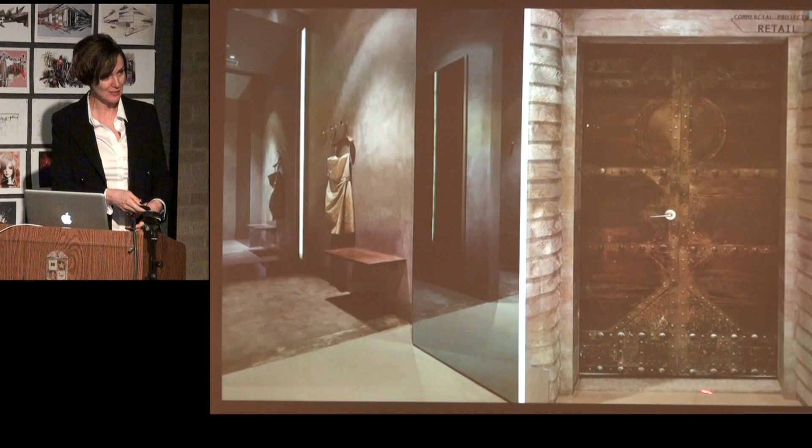Really, really beautiful - it was pink and blue when it arrived, and they changed all the wood back to the original finishes. Then he sent me an image and said, do you think this is okay as an exit door? So yeah, just make sure you put the exit sign above it, because I would think this is an exit door. But yeah, in China this is approved - I don't think I could get away with that here, but I think it's probably the most beautiful exit door in the world, right?

Only easy ones. Anybody?

I have a question about school designs in Monrovia. It looked like you mentioned how architecture gives someone the ability to define their identity. I wanted you to expand on that, because they're little people, and we don't really understand how they're defining their identity culturally as children. How do you feel architects can help with that?